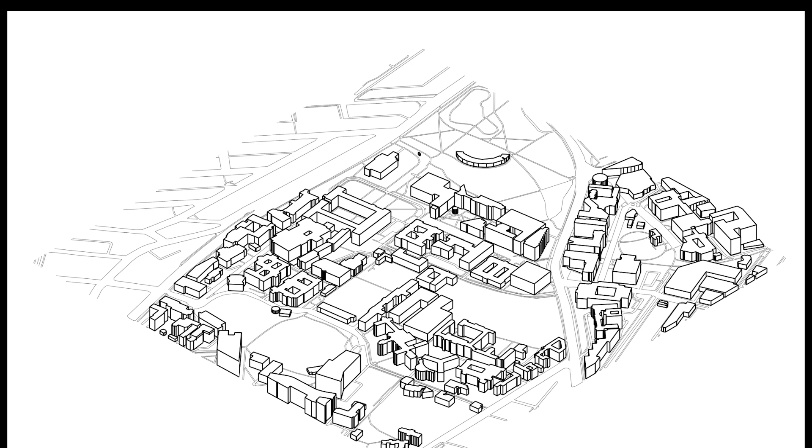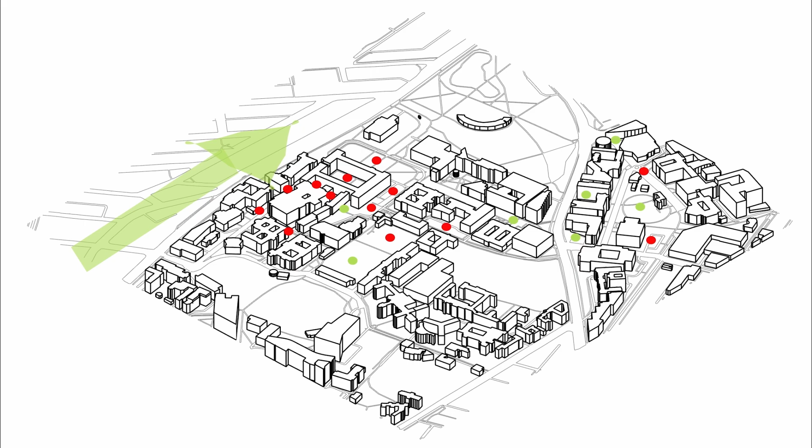In response to the words of Jan Gehl, we undertook a broad analysis of the university's public spaces. We found that there is an overprovision of transitional spaces, particularly in the heart of the university. Transitional spaces do not accommodate for inhabitation and hence leave said spaces void of interaction.

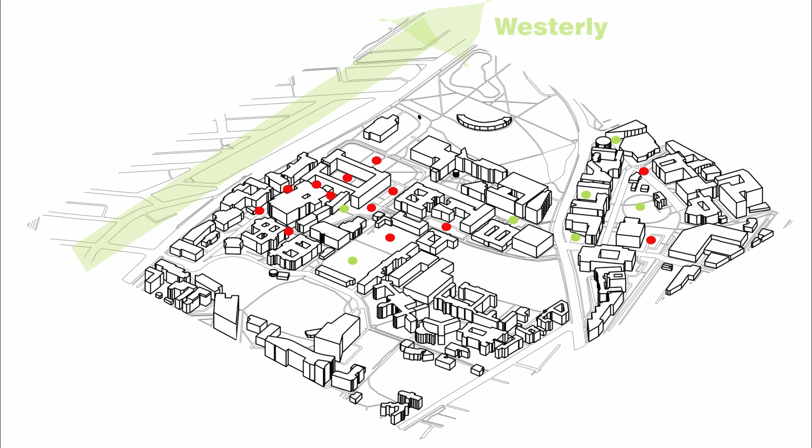We also did some broader research into the site, looking at prevailing winds and the path of the sun at various key dates, such as both solstices and the equinoxes.

Following the broader site analysis, we chose to focus on the solutions for a single space that could be used as a case study for others within the university. Our site was chosen based on its highly transitional properties. This can be seen through our heat map showing auditory patterns associated with the movement of individuals.

We also reviewed the various demographics that are most likely to use the space, as well as the provision of seating in close proximity to the space.

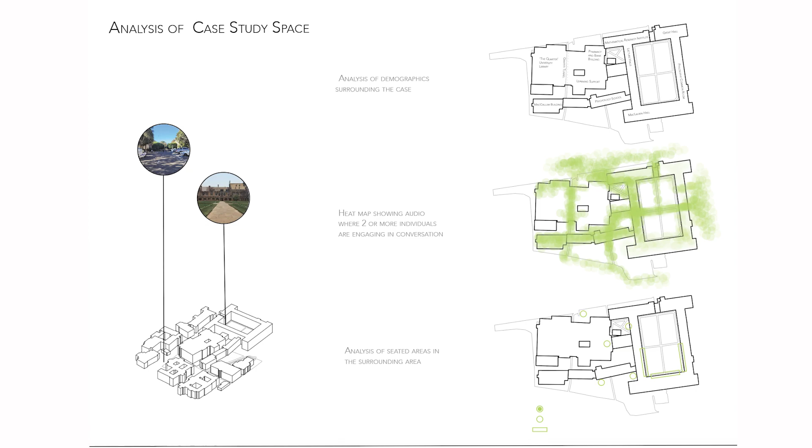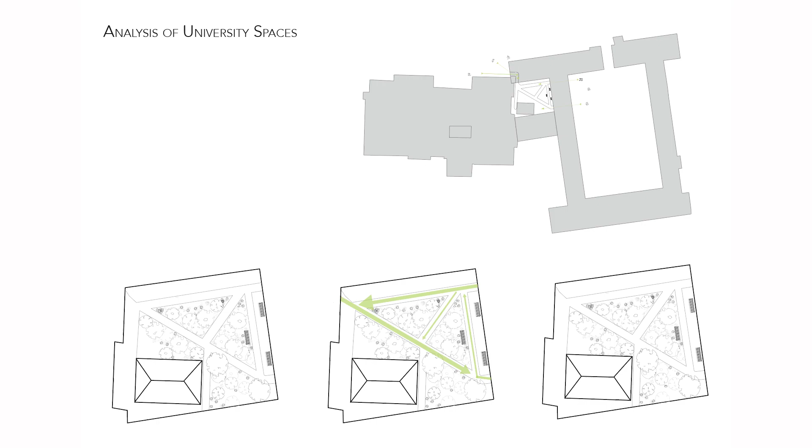Our site primarily acts as a liminal zone between the Science Alley and Quadrangle. It offers 3 primary paths connecting the 2 spaces. These paths break through a beautifully designed garden with little to no seating or areas to pause and briefly inhabit the surrounding scenery. Through initial observation, we concluded that this site had large potential to become a zone of optional activities, allowing social interactions and moments of pause in what is now just a transitional space.

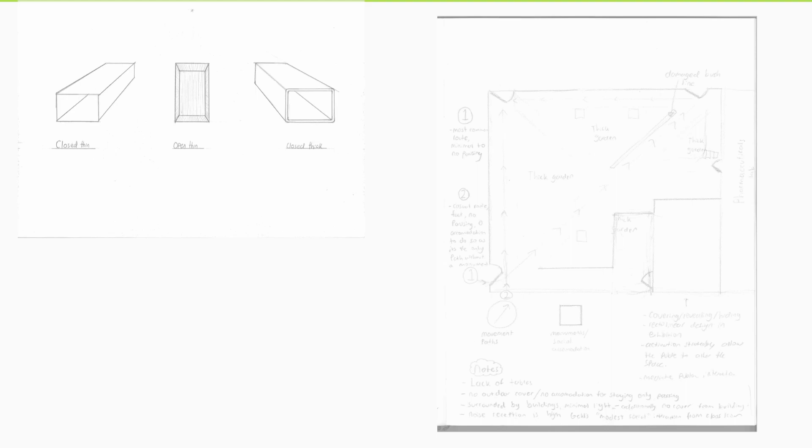We hence came to the conclusion from our research that individuals currently using the space are often too fixated, stressed, or in a rush to stop, inhabit, and enjoy.

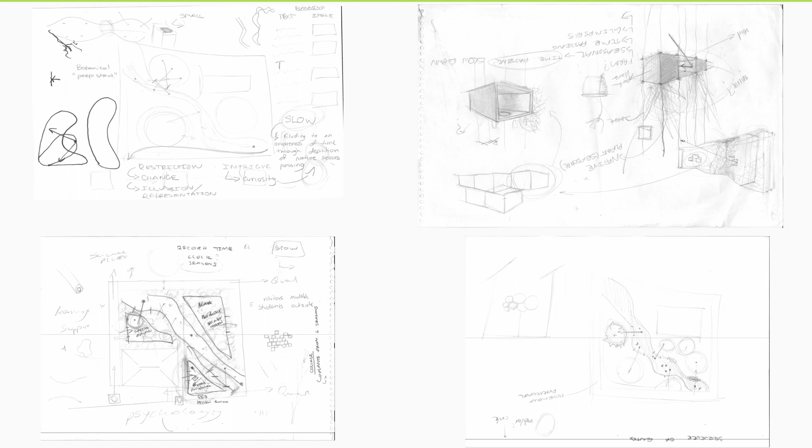We thought it would be most relevant as such to create pause moments in order to get people to slow down and contemplate inhabiting these spaces, which they would usually move through almost unaware of their surroundings, fully unappreciating said spaces.

We then thought about ways in which we could slow down the movement of transitional spaces while making the spaces themselves more accommodating for inhabitation.

Given the demographic of the site being predominantly university students, we thought it would be most effective to create pause moments through a spark of curiosity that creates a sense of intrigue, encouraging individuals to contemplate inhabiting the space.

We aim to achieve this curiosity in 3 distinct ways: through change, restriction, and illusion, all used in the storytelling of the 6 native First Nations seasons.

Seasonality is introduced as a way of alluding to the time passing in a further attempt to slow the movement down in the space and get people to pause.

Our method of storytelling takes the form of small moments realized through the framing of key First Nations seasonal symbols. We designed the layout of the park to suit the format of storytelling, creating a single path that brings people on a journey through the seasons, using physical barriers to slow and better communicate First Nations values.

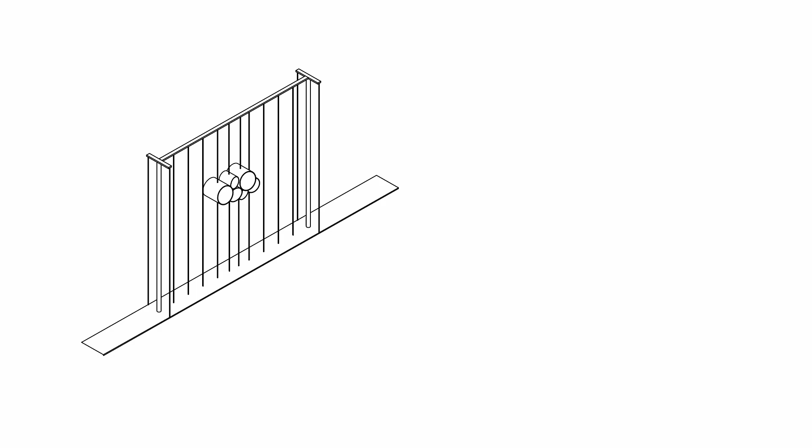Simultaneously, we maintain the efficiency of the space through the implementation of a transitional zone around the perimeter of the garden.

Given the concept of our project being so closely tied to First Nations land and people, we thought it would be fitting to work within the Wingara design principles. This is expressed through the representation of First Nations seasonal values, however primarily through our choice of materiality, regarding elements such as rusted metals, sandstone pathways, and timber seating.

Along our primary path, we decided to include mirrors into our framing mechanisms, warping the depiction of seasonal iconography as you enter the path. These mirrors not only strike initial intrigue and curiosity, but also urge visitors to indirectly engage with and witness the seasonal phenomena existing within the garden spaces.

In relation to Jan Gehl's framework, we have offered and designed a blueprint converting a transitional space into what Gehl outlines as a good public space. Through enticing curiosity and offering optional activities, we have allowed this liminal space to become a site of social inhabitants and cultural value.